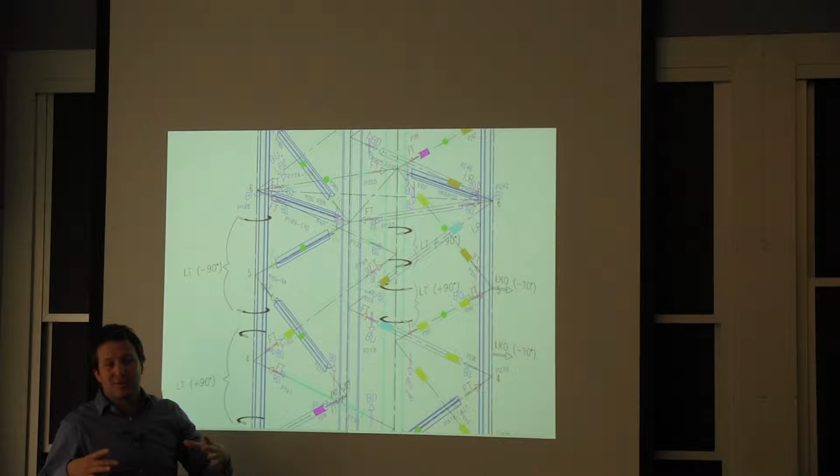There wasn't a lot of these tubes that were kinked, or the connection to the gusset plate, or the legs in that case, they didn't really have gusset plates. It was to the leg, but it was compressed this way, bent this way. So that tends to not be an initiator because it doesn't really create a separation. Pulling it out creates the separation.

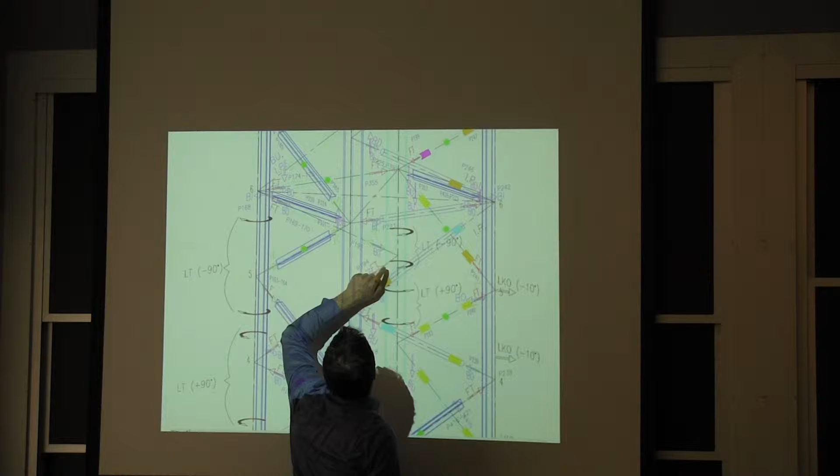So being able to say FT, that's in tension, tension, tension, tension all around. And you break on one side, the other side now is just free to move. It's going to bend and do whatever.

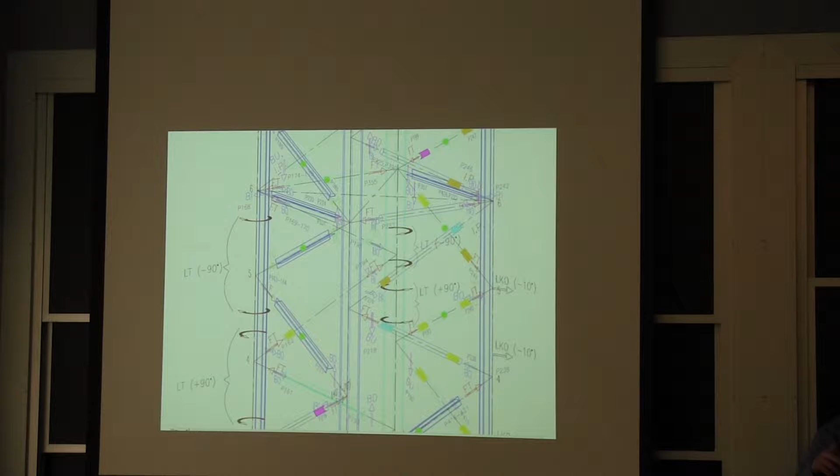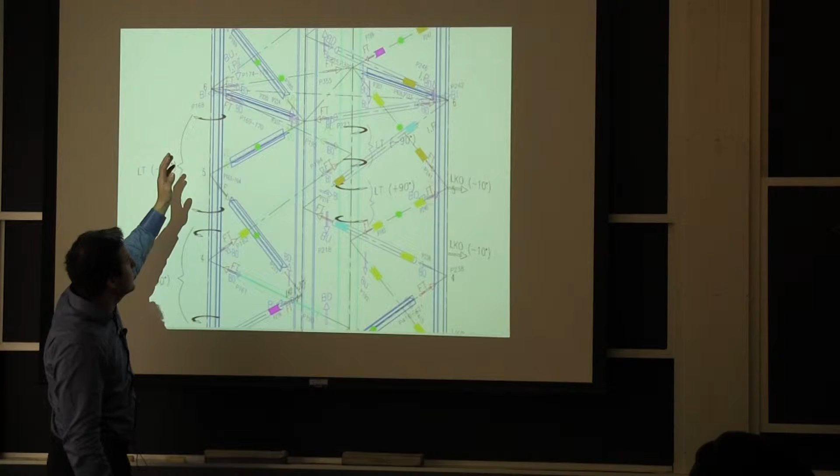So the only way we were able to do this is we had a team taking a bunch of notes, labeling each node and figuring out what was the failure mode. Was it a tension, a compression, a bending up or down? Because after it opened up, then we had a lot of shear.

It's 4 planes with diagonals, so there were 2 of them that just moved as a wall, and you lost everything in between. And the next step, the big legs started to buckle, because now you didn't have any support.

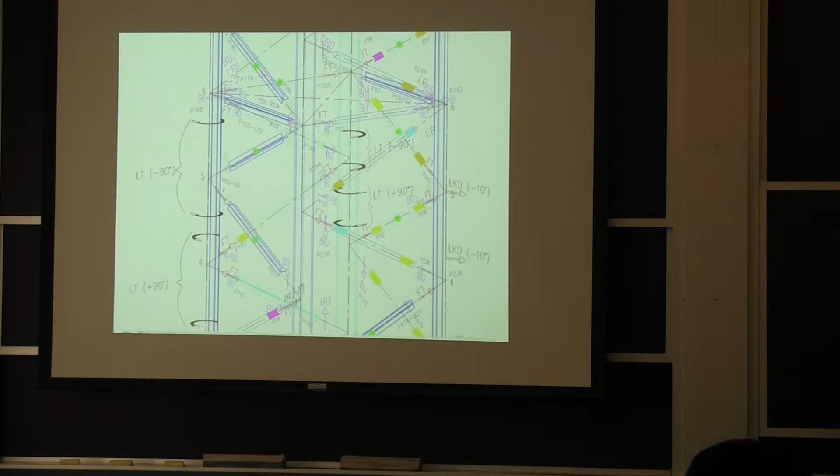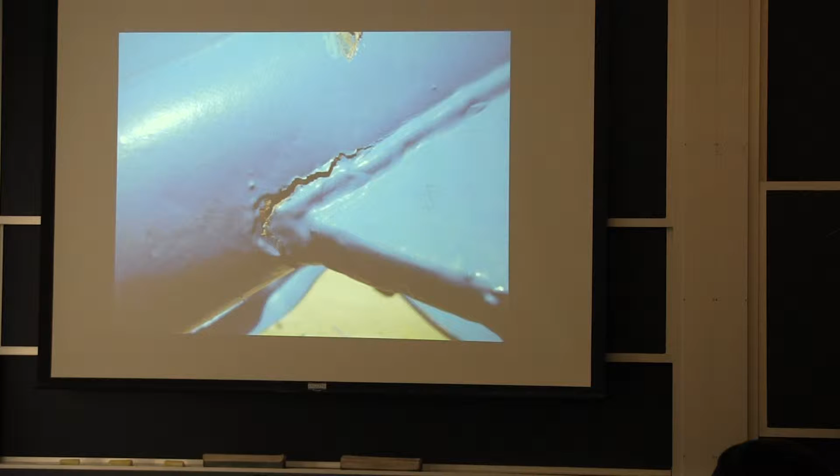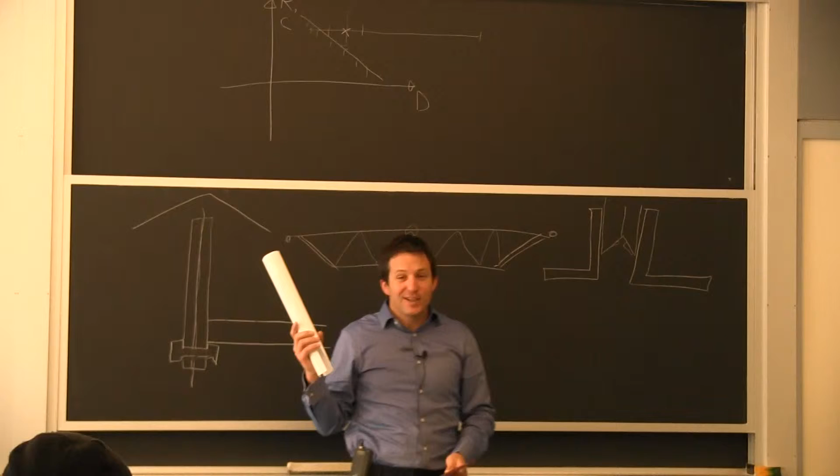But essentially, it was looking at each individual connection, and that's one here with this tube to the angle corner. So this is the equivalent of your gusset plate. It's welded all around. It broke exactly where we would predict it would break. It's not the initiator because it's still connected, but it's just an example for you to look at.

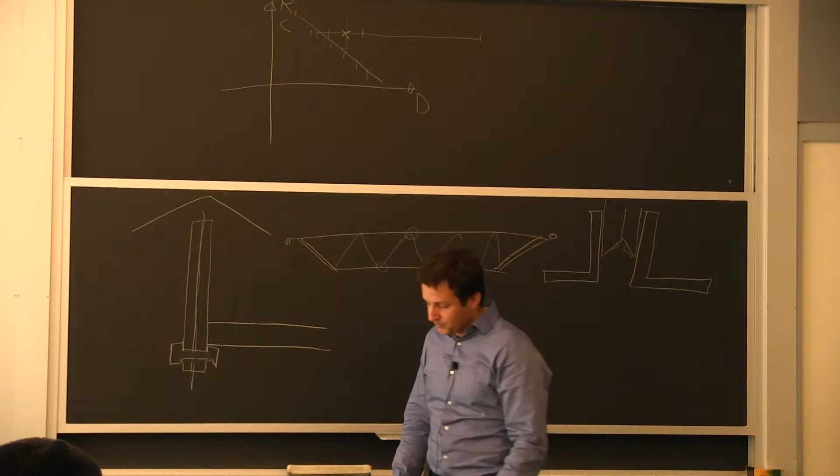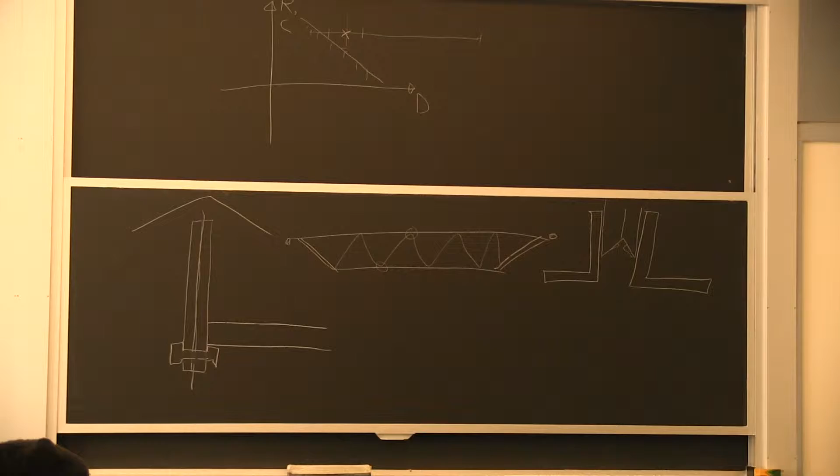This is one that was completely broken and in tension. Now, this photo was taken hours, maybe 48 hours, something like that after the collapse, and they don't have rain over there. When you see that rust, it was already cracked way before the incident.

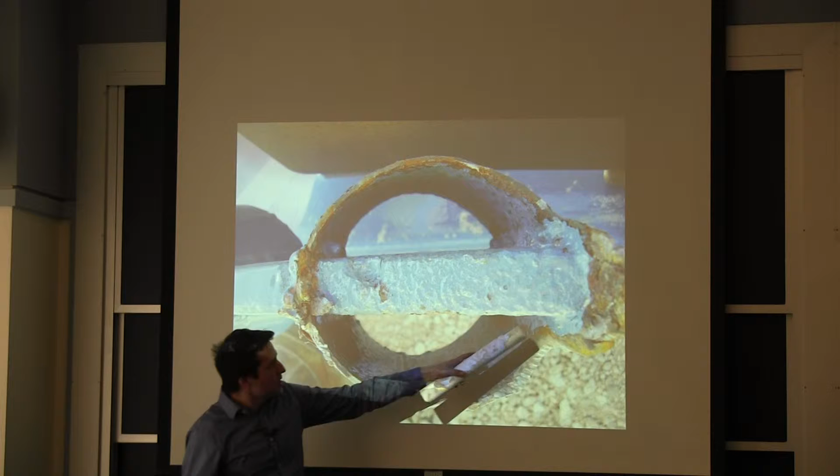It's not something that happened on the day of the incident. So when you have this cracked over here, did it extend halfway becomes a question. Was it cracked also on the other side? And that's where you start thinking about a tube - oh, this tube should be able to take 5,000 pounds of tension, to something like, well, maybe it only took 800 pounds to break it, something like that.

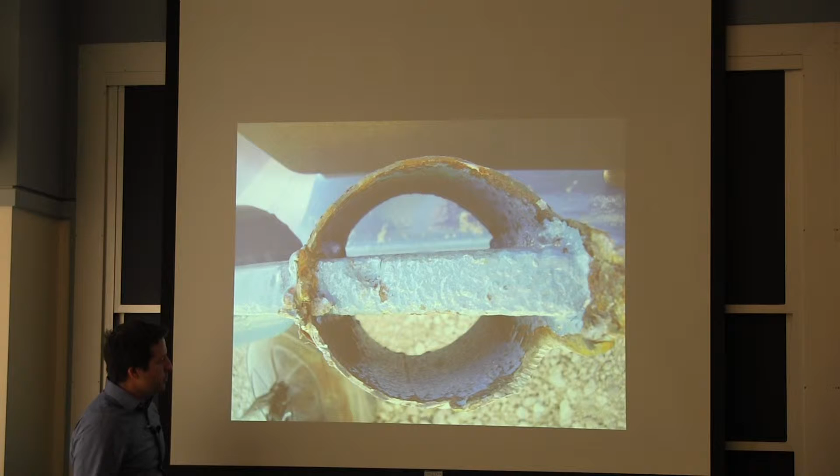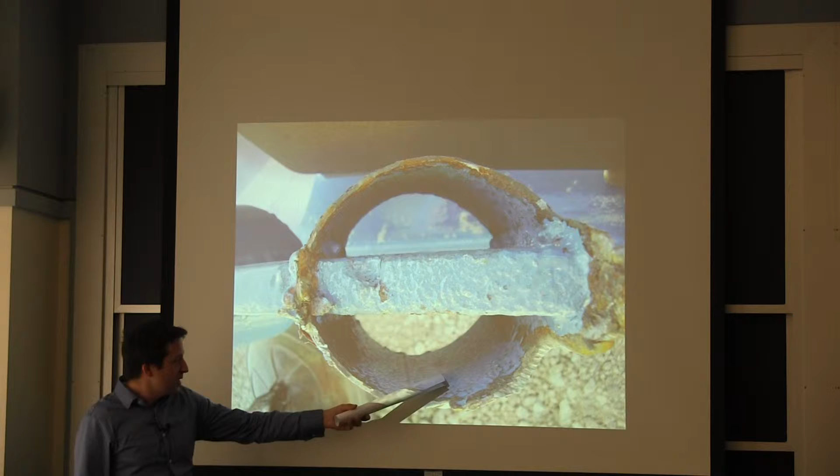It's very unfortunate. At the same time, it's a lesson in terms of receiving inspection. If they ask me to look at this whole crane when they got it, these are the kind of things to look for. It's painted, it looks nice, but this whole surface is pitted. It's inside the tube, so there was a lot of damage to the steel before it even got to the site.

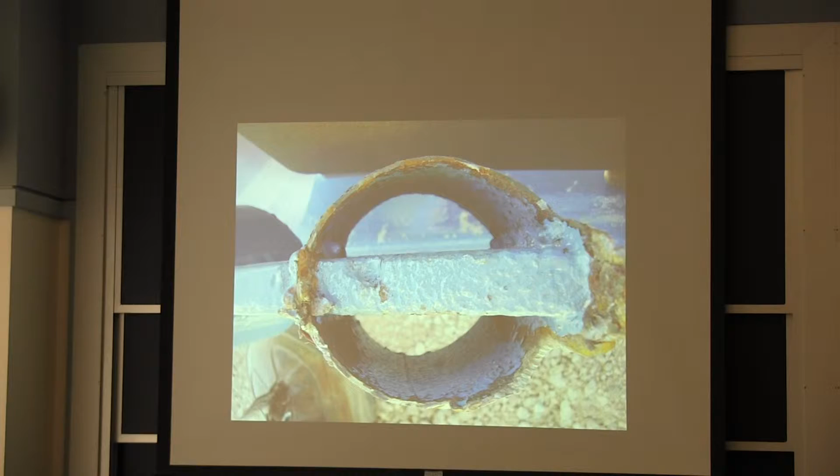And if you want to see what the government says about it, there's some public information about this, and it's normally the case, but it's unfortunate. People just have a project, they say, okay, well, we used this crane before, so let's get a fabricator to repair it. They had some repair welds, they had patches, all sorts of things, and nobody went back and said, well, is this going to be strong enough? And that was part of the problem.

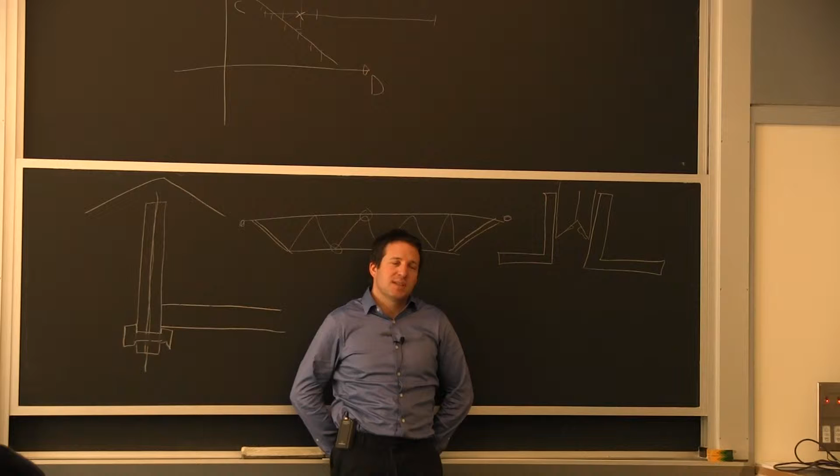The regulation for this type of system, because it wasn't for people, it was for material, is just not exactly as strict as if it was for workers.

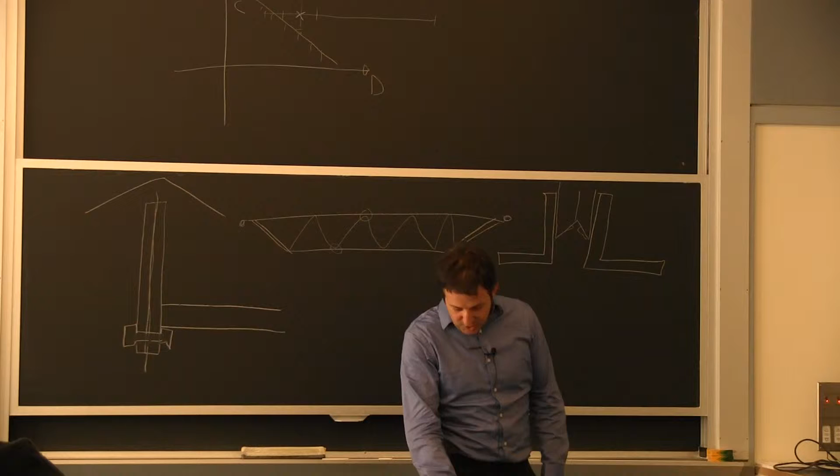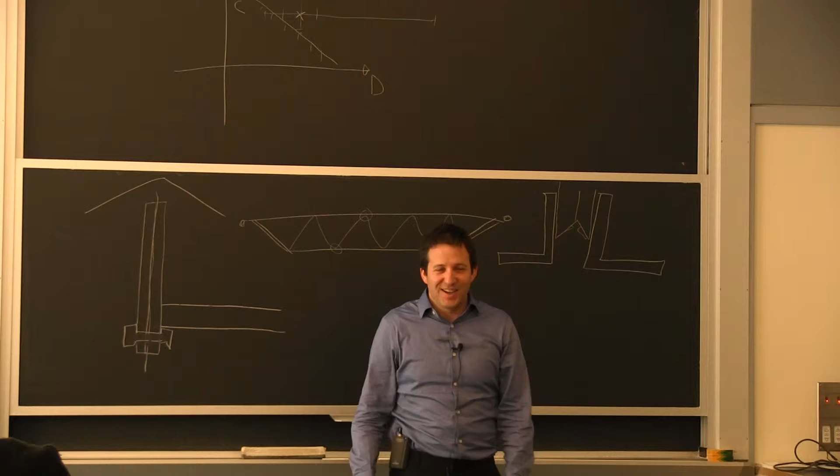Nevertheless, they were moving workers on it sometimes, using the excuse that it was safer than having them crawl around over the arch. So at the end, you do wonder, why are they allowed to be almost unregulated here? It's a very high risk structure.

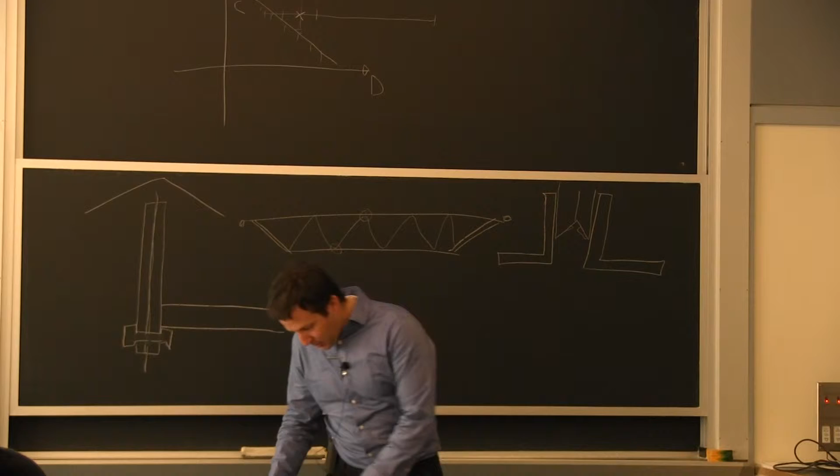The example I'm going to start with, before I go to this piece, let's do this very briefly. This is a big shaft for a wheel, I think it was on a train, and the reason I'm bringing it is just to show you what you can learn by just looking at a fracture. It is a complex fracture, right? It's not like pulling a specimen on a tensile machine.

What happened is there were multiple initiations. There's a crack that started right over here, and there was another crack that started on the very opposite side, and they pretty much met somewhere in the middle. You can see beach marks when you see these lines - this is where the crack was at a certain point in time. All of this was already cracked, up to the point where, to tell you the truth, this is the only thing you had left at the time of the failure.

When we see those, it's very easy, you don't even need fracture mechanics to say the load was not that high. This is not a problem with load. This is a problem with fatigue, which starts a crack around the circumference, and a lot of cycles going around turning grow these cracks.

A lot of times, and that's what happened in elevators as well, the bearing starts to move. It's supposed to be press fit, and the movement is supposed to be taken care of by the rollers or the balls. But if the race starts to move against the shaft, you create gouging, and that's what initiates these fatigue cracks. So even though this is designed with a factor of, I would say, 15 against the static bending maximum load, it still failed in service.

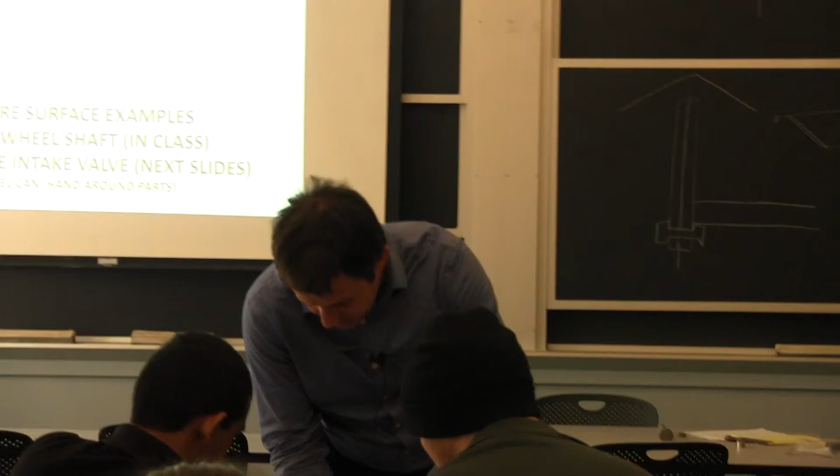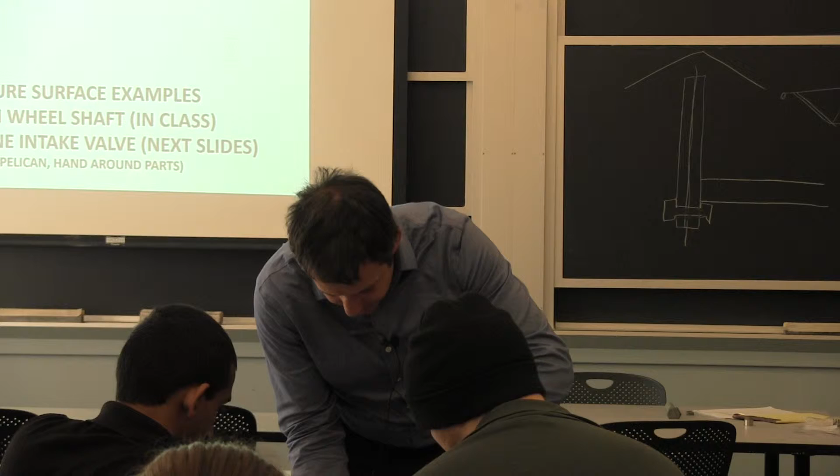So if you look right here, you see these little lines - you had multiple initiation sites. One crack started here, one crack started there, just at slightly different heights, and they were all going that way. You can see here that when it started going this way, this is the local direction. So if I'm looking in this area under the microscope, I know if I'm looking for initiation, I have to go that way.

It's less obvious over here, but it's the same right here - you see this one, this one, this one at an angle. So this is where it started, one of the initiations. There are multiple - there's another one right here, so now we found a third initiation site.

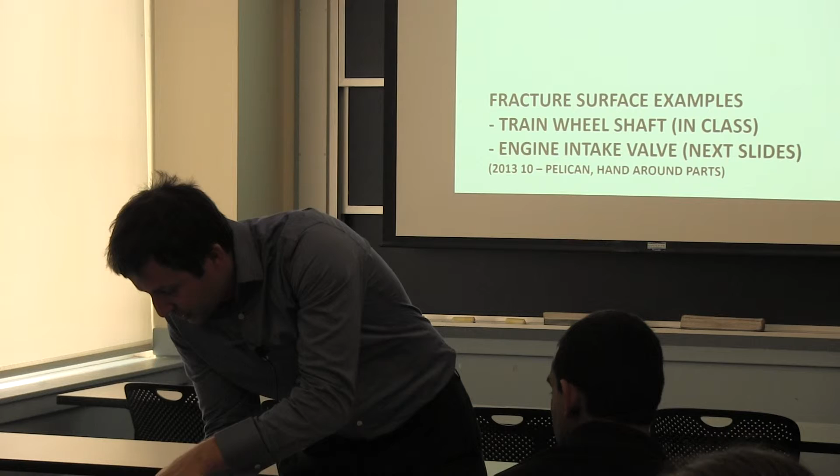Crack propagation line - this big step right here tells me over here the crack was going that way. The crack arrest line is all these beach marks. So when I say beach marks, it's the same as the crack arrest line - it's where the crack was at a certain point in time. These big steps over here tell me it all started in this area, and there's another step here, so there was another initiation right there, for example. At some point in time, the crack was just going exactly along these little lines.

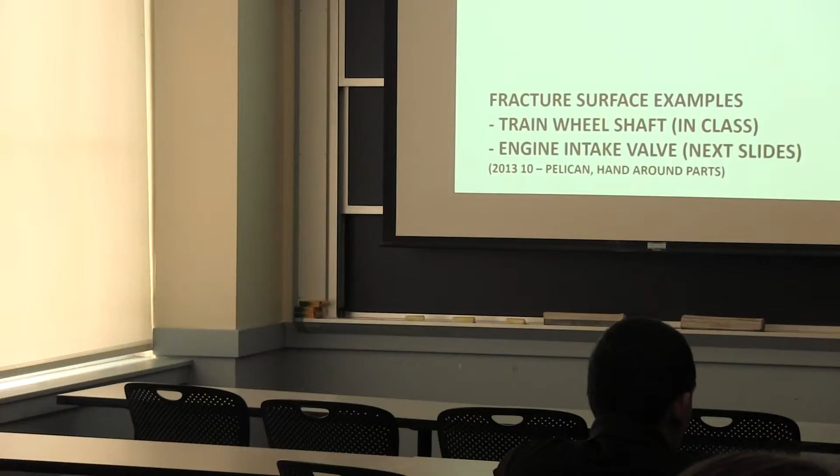So at this point, we've identified at least 3 initiation sites. If we kept looking, maybe we'll find more. What does it mean? Well, it means it wasn't that hard to start a crack. If it started at 3 locations, they were competing to reach the center, so there wasn't just one problem with this system.

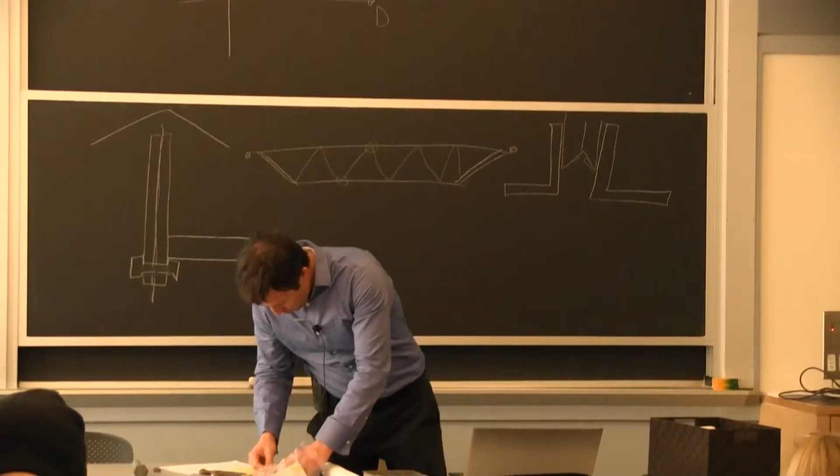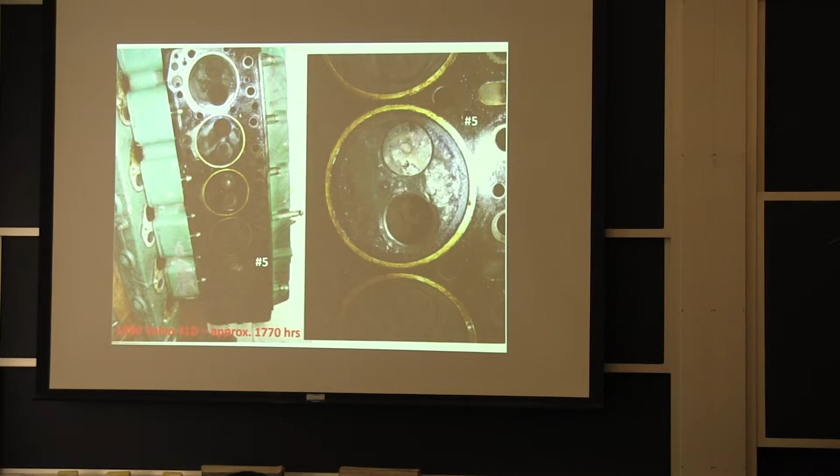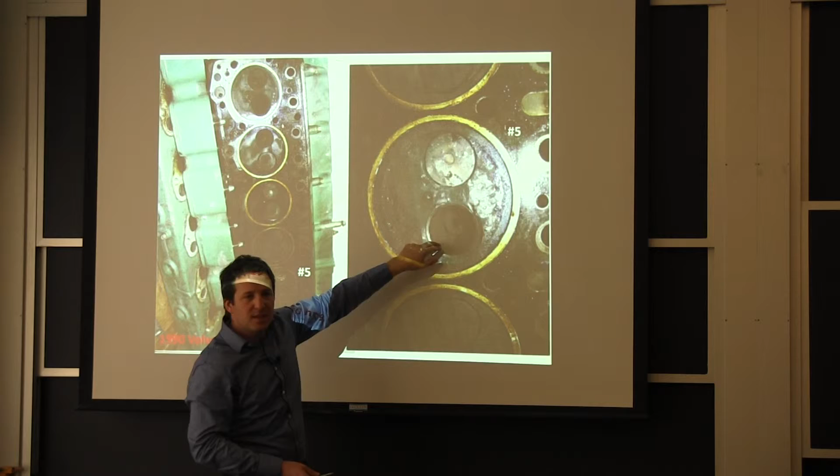This is the stem portion of an intake valve. It's a 6-inline Volvo diesel engine. You've got these two different valves here, one is the exhaust and one is the intake, so they all open at different points in time, and the combustion chamber is just being removed here. The cylinder is out to be able to see what's going on.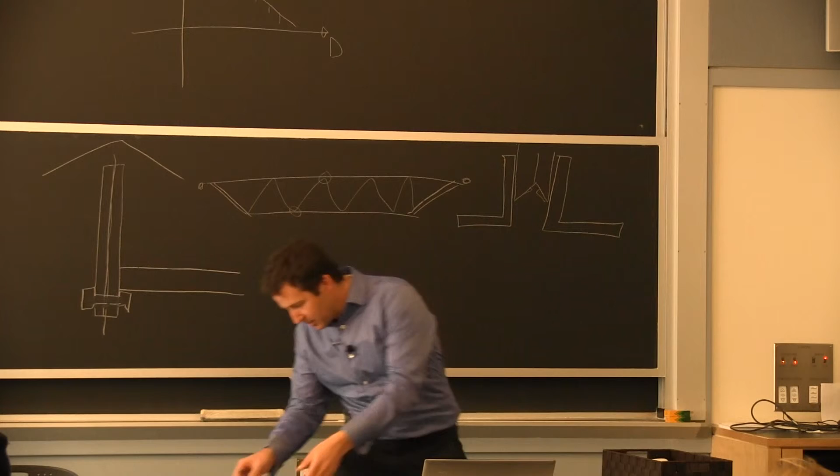It failed essentially at the junction between the valve head. So if I take it here, this is sort of how it was located, more or less. And it's completely out at this point.

This was not obviously the biggest loss. The reason I'm mentioning it is I was talking about crack propagation lines, and it allowed me to determine what happened. If you look at this one, it's the same story where there's a lot of fatigue, and the final fracture is that little corner over there. This is the only thing that was left at the time of losing the valve cap. This part here is the final fracture.

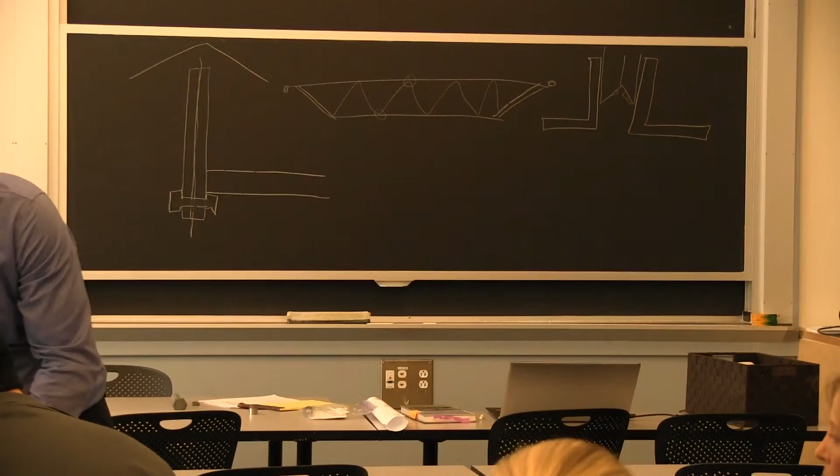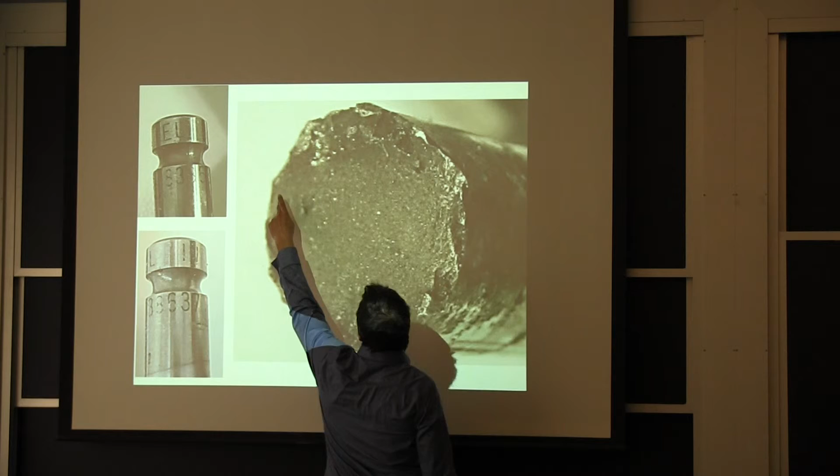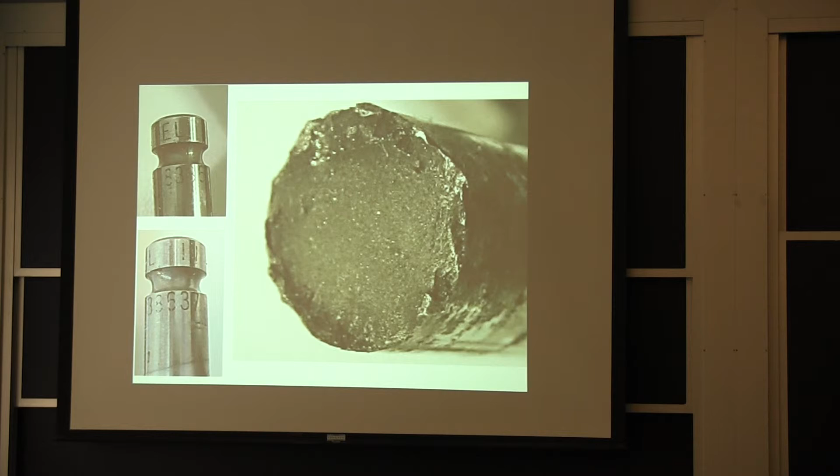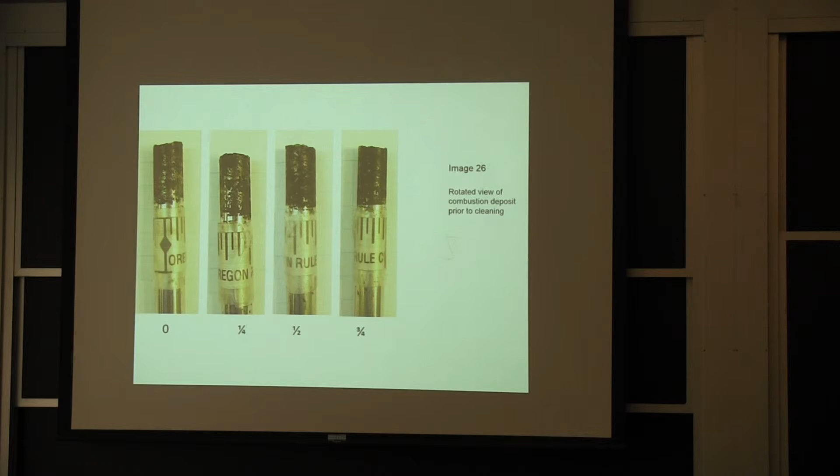It was dirty. When I was looking at this, I was thinking already, oh, maybe this is my final crack propagation line, and what is on top is the final fracture, but I couldn't say for sure. So when I was talking about documentation, one of the first things I said was, I need to image this before I clean it up. This was the condition of the deposits, then I put it in an ultrasonic bath with some mild detergent, and I got to this point. It's still not exactly clean, but at least I was able to look at the fracture surface and make my interpretation.

So final fracture, there's this line here. This is when you reach the fracture toughness. There was only so much material left, very little, okay? And looking on the other side, I have this beach mark here.

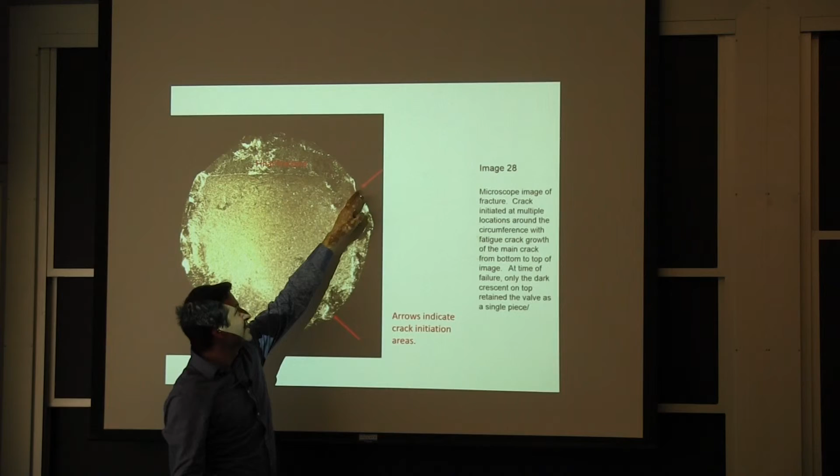So this is one area where the crack started. I have another beach mark here. Oh, it started here too. And then this is harder to see from here, but I kind of knew there was an initiation site there too. Another situation with 3 initiation sites.

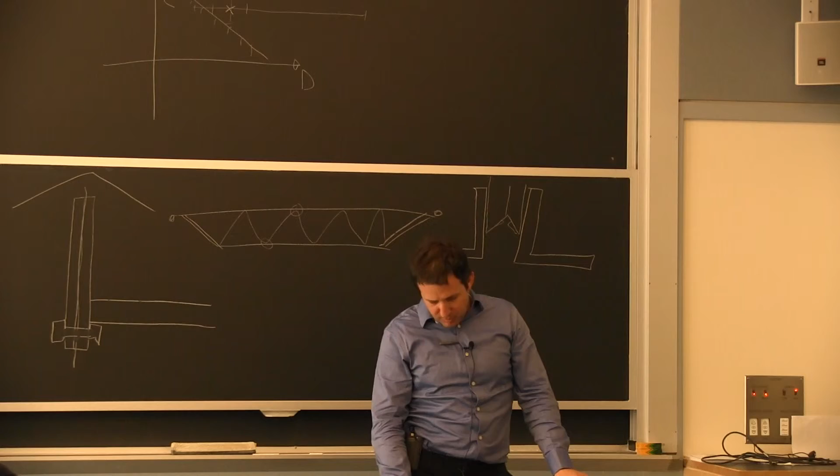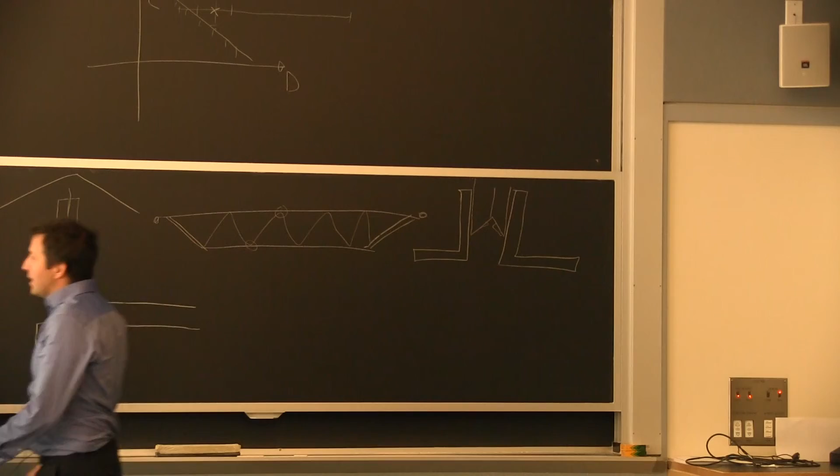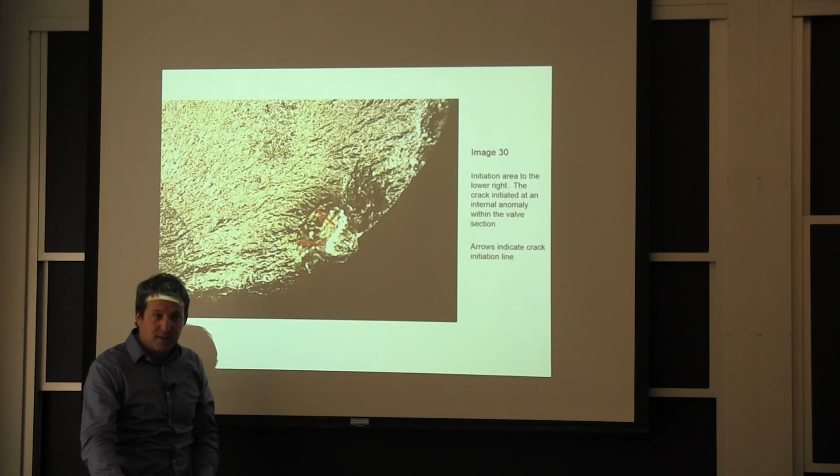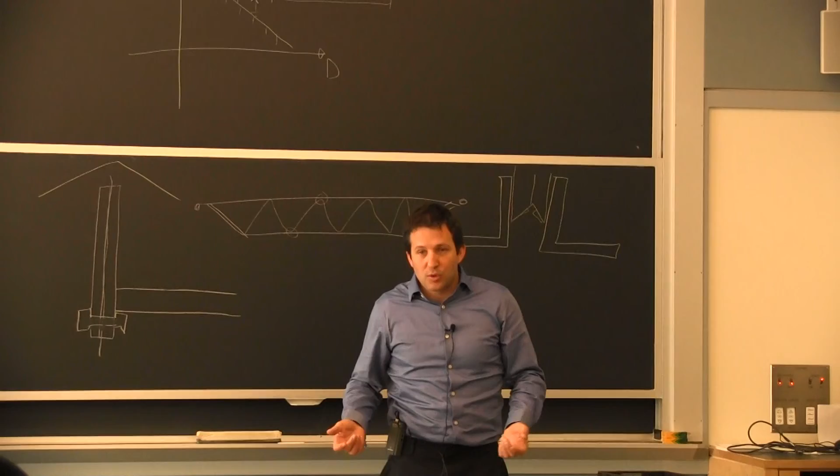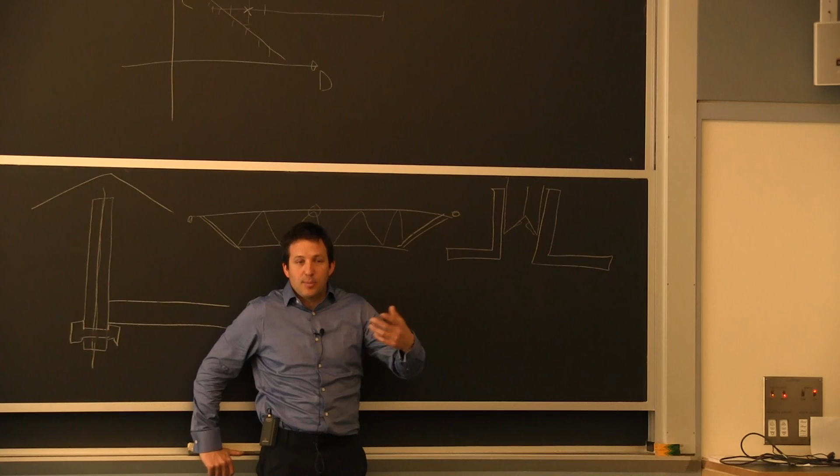This is not a corrosion pit that happened after starting the crack. I formed the corrosion pit, and then I started the crack, which means at some point the engine is 25 years old. My guess is for 5 years it hasn't been used, and it started corroding. I had all these pits, and you can see it on the side of the shaft. There's a lot of pitting. These pits happened before the crack initiation. Everything was fine up until I started pitting that shaft, and that caused the progressive damage, and then a couple of years later it failed.

So that was the lesson learned from that one.